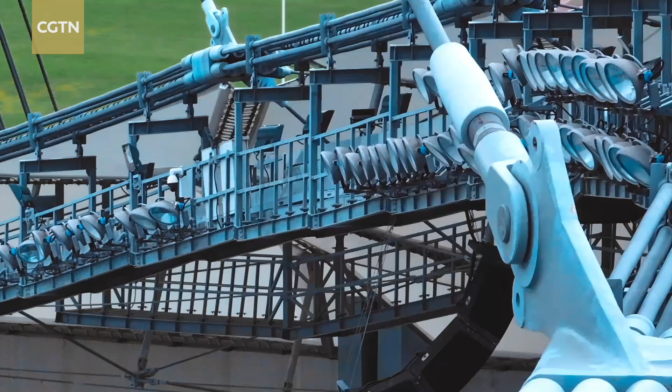What do we talk about when we talk about architecture?

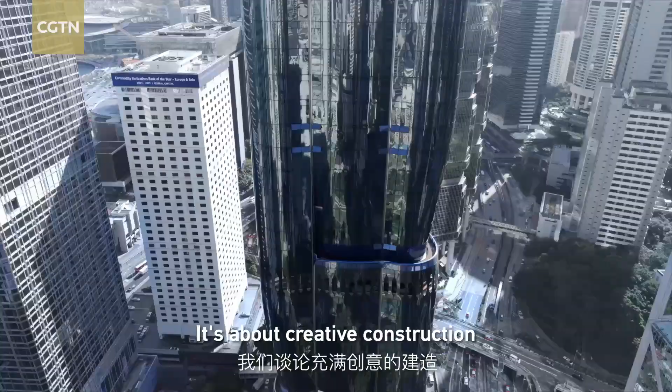It's about creative construction, the restructuring of space. The architect is the director of this space.

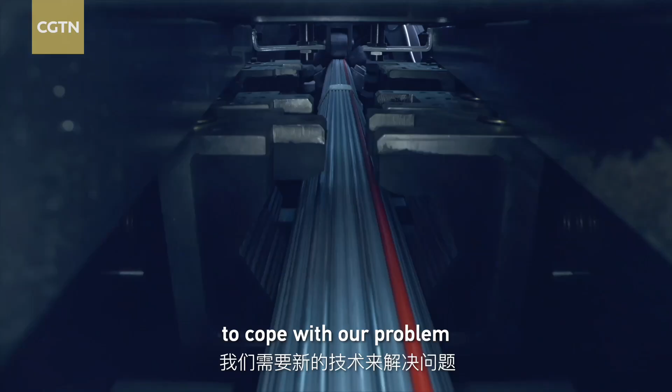The echoes of our culture, and responding to challenges. So we need to look for new technology to cope with our problems. It's all about human intelligence.

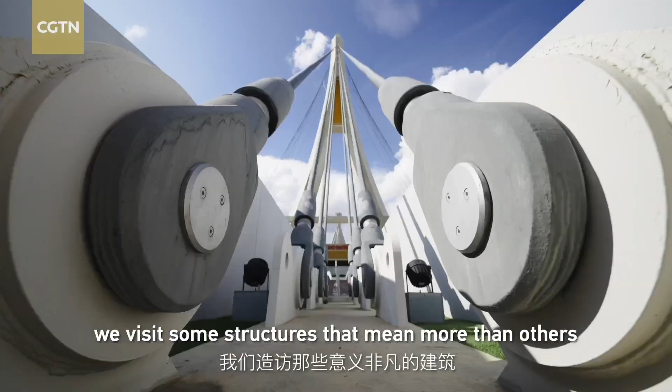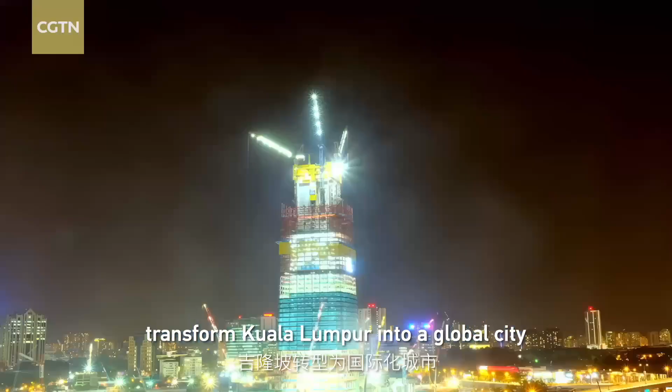In this episode, we visit some structures that mean more than others. Fireworks over the top, amazing stadium. They're not only for use, transforming Kuala Lumpur into a global city, but iconic landmarks and national pride.

We are moving in a good direction. They are imbued with greater hope and carry significant missions.

As dawn breaks over the silhouetted spires of these temples, I'm reminded of Cambodia's glory days. These stone carvings and intricate reliefs are testament to a thriving empire. It was a French explorer's surprise encounter in the mid-19th century that brought Angkor Wat to the attention of the Western world.

Emerging from conflict and wars, Cambodians today are rekindling the world's interest in this country that has been shrouded in the mist of time. Like their ancestors who immortalized the Khmer Empire in the form of Angkor Wat, Cambodians need a modern colossus to record future ambitions.

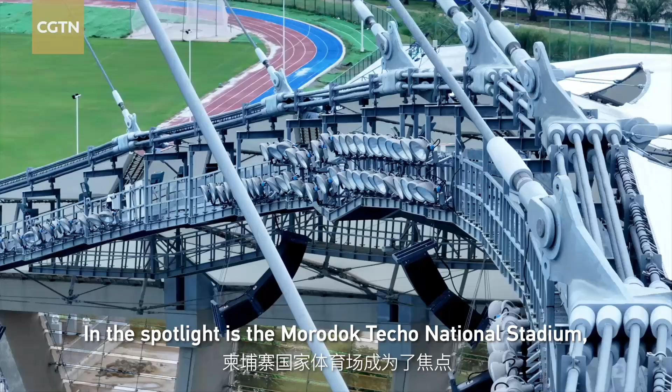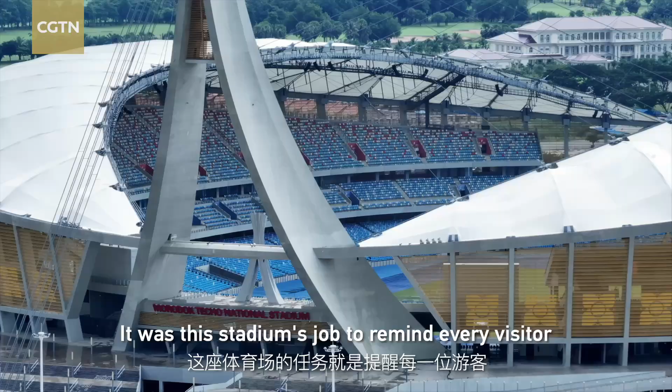In the spotlight is the Morodok Techo National Stadium, mirroring the form of a traditional dragon boat and surrounded by a moat reminiscent of an ancient Angkor structure. It was the stadium's job to remind every visitor what this nation is proud of.

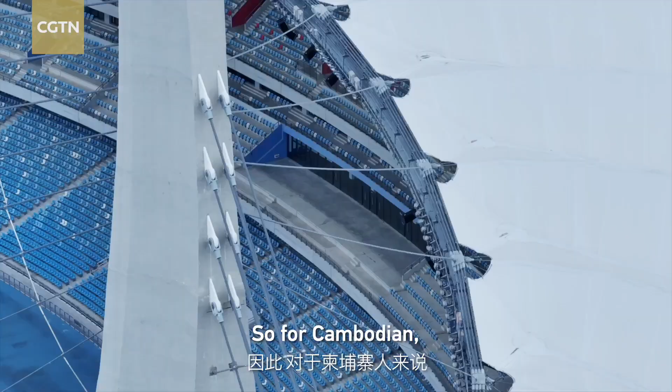So for a Cambodian, if you come to the stadium for the first time and you see the tower like that, you will realize, okay, this is the Sampeah gesture. Even though they're not told first, they can understand this.

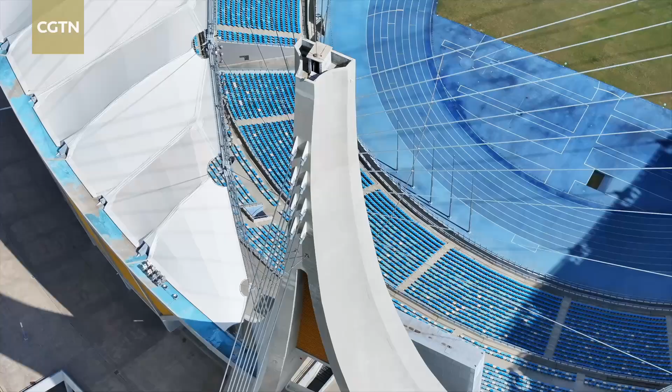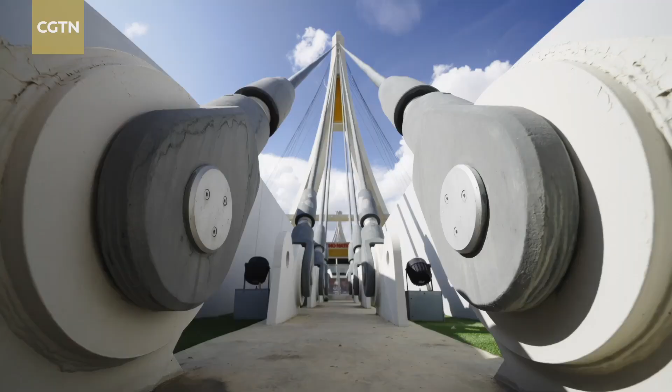At the heart of this architectural wonder are the pylons, shaped in the Cambodian gesture of greeting, Sampeah. This towering structure presented a formidable engineering challenge.

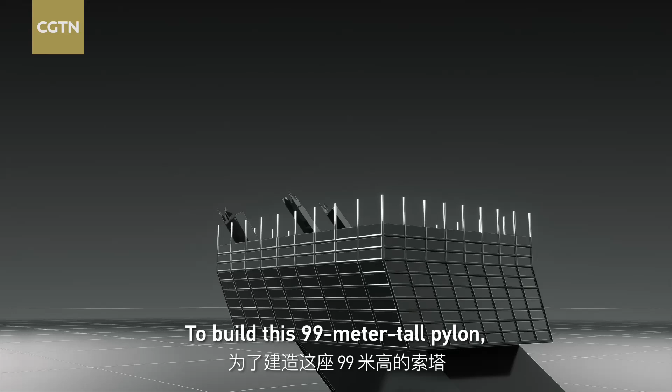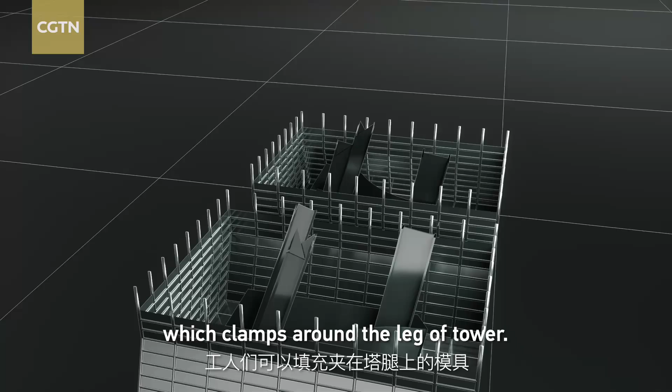To build this 99-meter-tall pylon, the team used an ingenious technique called slip forming. Workers fill the mold, which clamps around the leg of the tower. Once each layer is set, hydraulic jacks raise the mold up to the next level.

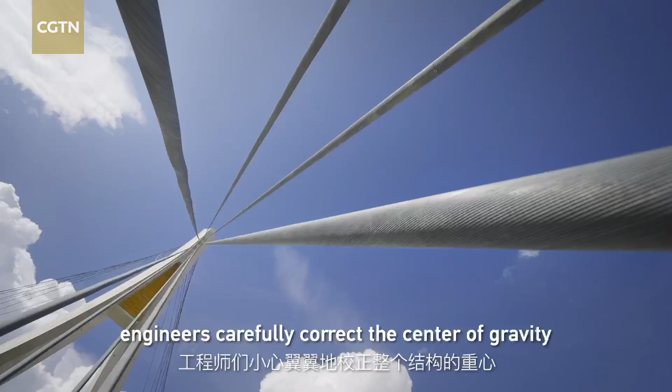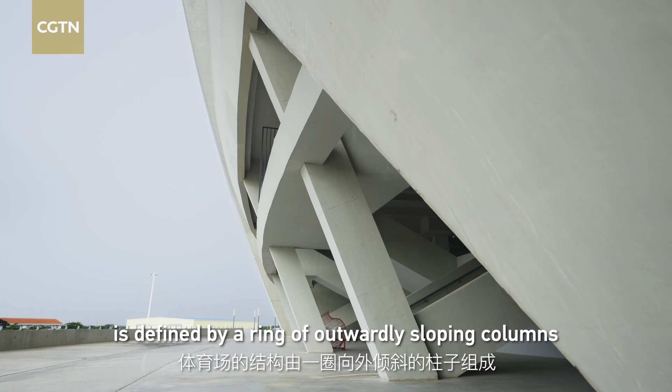However, it's not just the pylon that's leaning forward. The stadium structure is defined by a ring of outwardly sloping columns at an astonishing 66-degree angle.

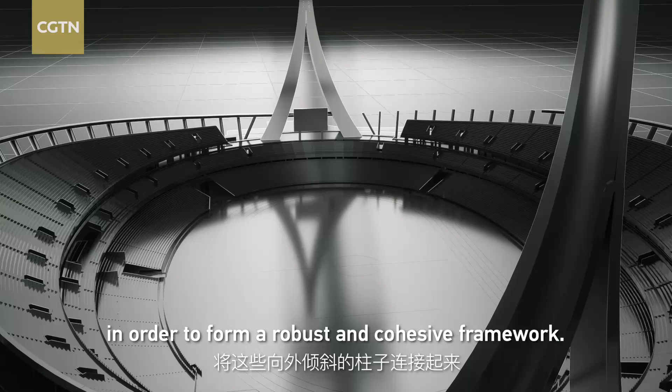This massive ring beam was built to unite these outwardly sloping columns in order to form a robust and cohesive framework. They're crowned by a huge canopy, binding the entire structure into a unified entity.

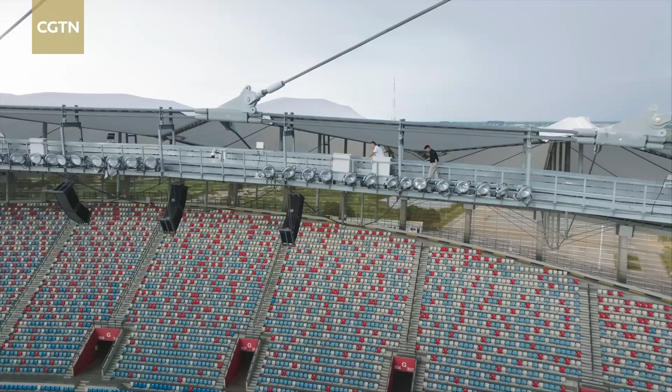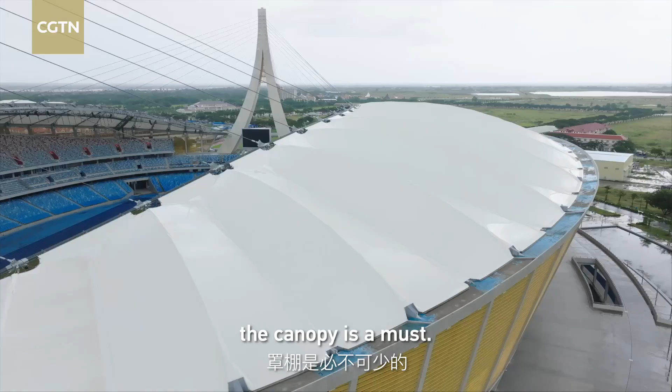In a land familiar with monsoons, the canopy is a must. But in terms of engineering, the canopy is more than just a cover—it's the final step that makes or breaks the whole project.

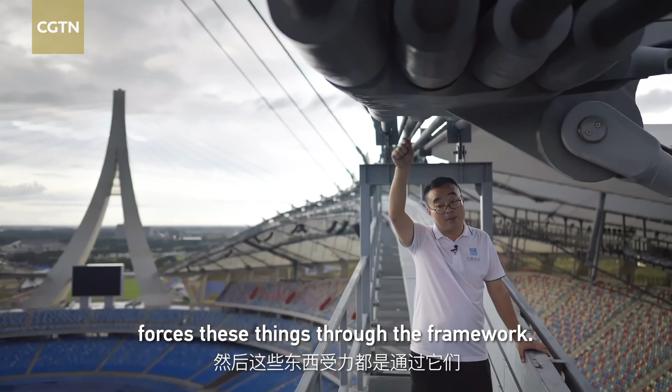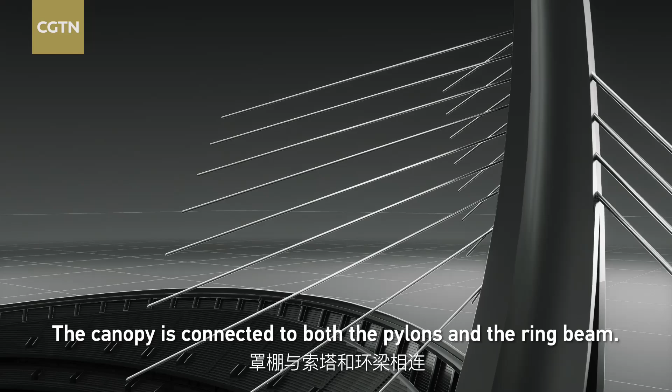The canopy is connected to both the pylons and the ring beam. As the skeleton is fully tensioned, each part of the stadium is perfectly balanced in this system, resembling a cable-stayed bridge.

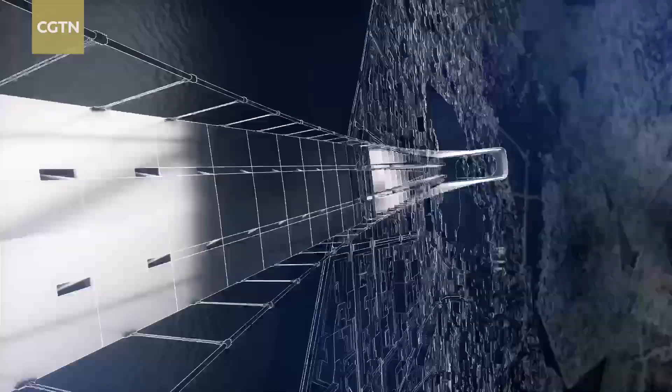Emerging from a small tin mining town 200 years ago to become the capital of one of the world's fastest growing economies in the 1980s and 90s, Kuala Lumpur is evolving again. Now Malaysia's goal is to become a high-income nation and a fully developed country by 2025, five years earlier than previously planned. This involves building the country's first international finance center.

TRX helps to transform Kuala Lumpur into a global city, helps to improve the city infrastructure, and created a new and vibrant district in the city center. Meet the Tun Razak Exchange, or TRX. Think of it as a city within a city.

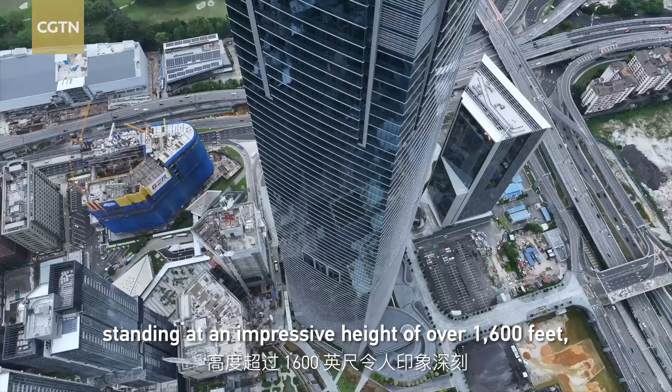They're looking for the biggest names in banking to get them to set up headquarters here. Building an iconic tower is also a part of the plan. The Exchange 106 was designed to be an iconic landmark standing at an impressive height of over 1,600 feet, around 492 meters.

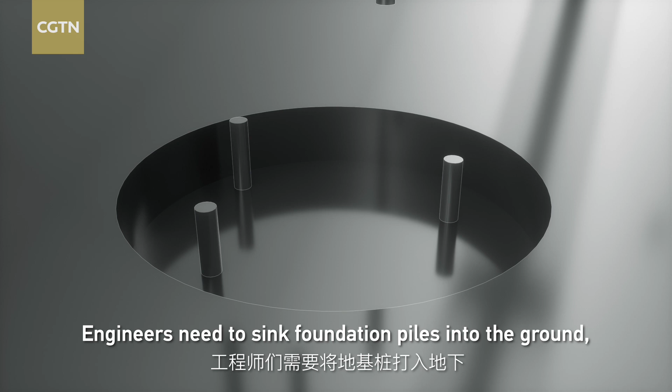Engineers need to sink foundation piles into the ground, capping them with a massive thick concrete raft to support the tower. Above ground, workers will cast a central core with an innovative mechanized mold, which allows the giant to be finished in a record-breaking 3 years.

Though without a spire like Petronas Towers, Exchange 106 is topped with a 54-meter high crown, immediately recognizable in the city skyline.

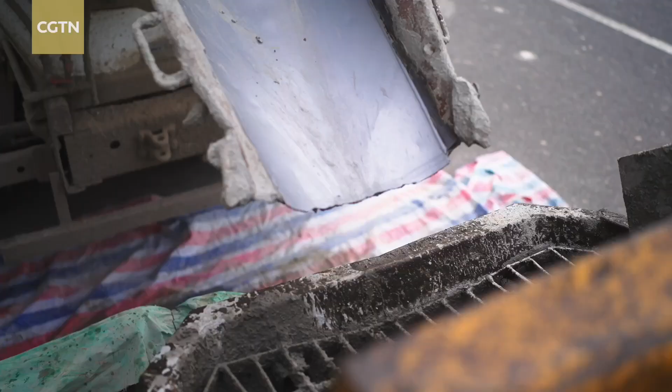Its success is based on the massive foundation.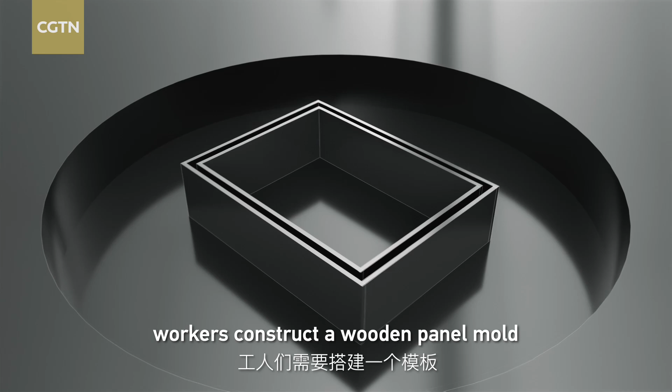Traditionally, to cast a core level, workers construct a wooden panel mold and pour concrete into it. Then they remove the panels, build new scaffolding, and lift the molds back up. For a building this tall, that would take years too long.

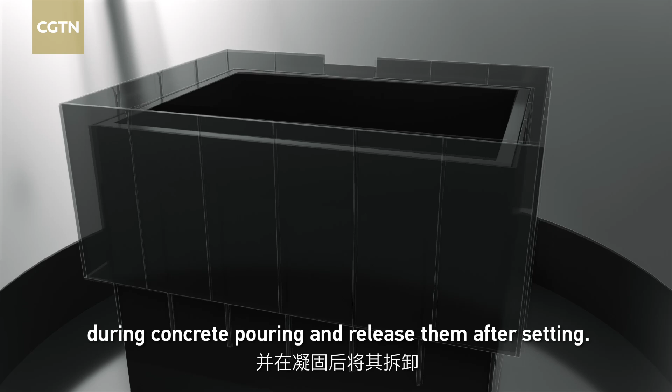Instead, steel rails attached to the core enable a large, movable platform to carry and climb with the mold sections. Workers lock the mold panels during concrete pouring and release them after setting. Hydraulic systems can elevate the platform and repeat upward transport.

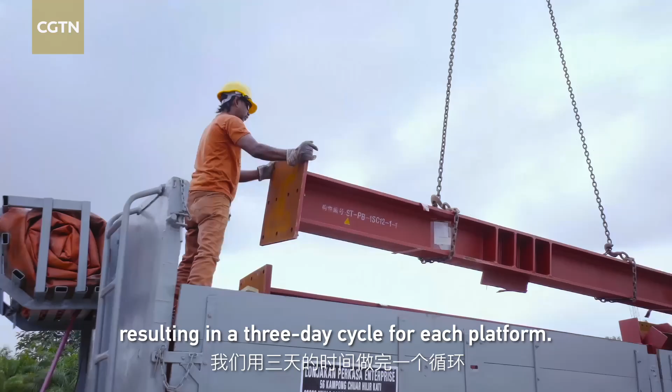I came to Shenzhen, where the same team is building another giant with the same system.

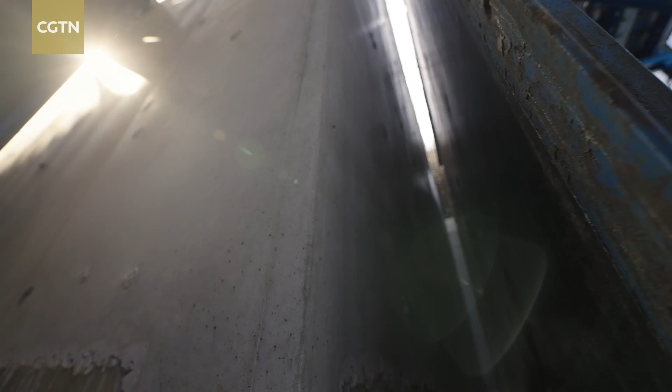They install the anchor shoes at the target position and pull up the climbing rail by the hydraulic system until it locks in position. Just like when a climber hammers spikes into the cracks of rocks, which they then clip their rope into.

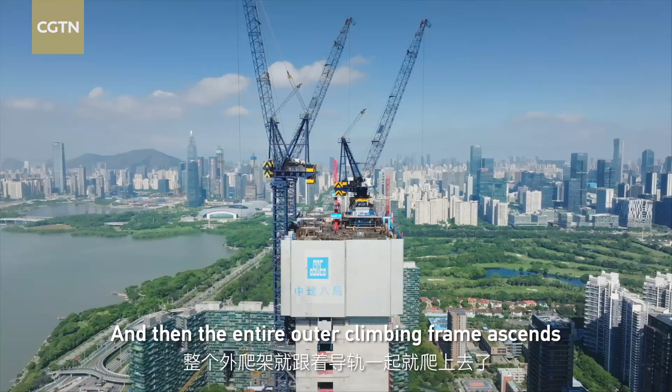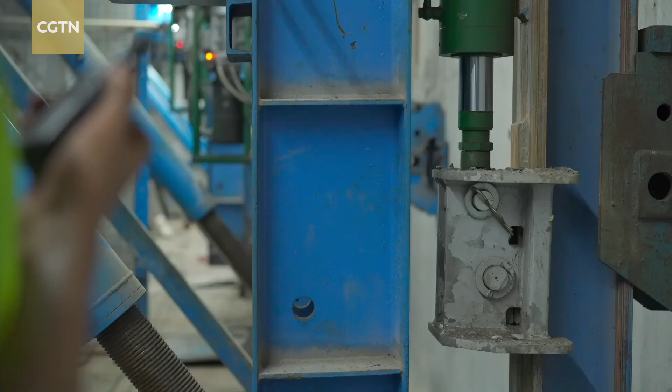The climb begins now. The entire platform creeps up with just inches to spare.

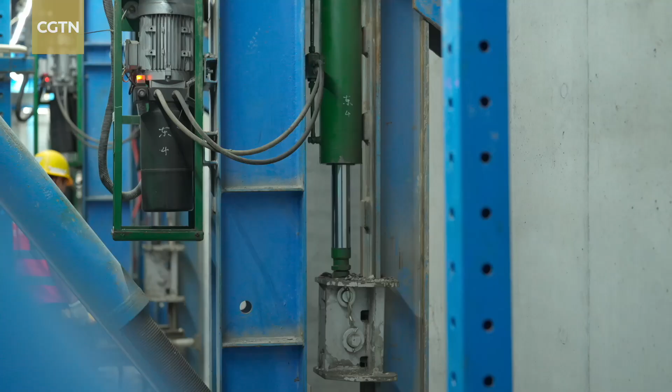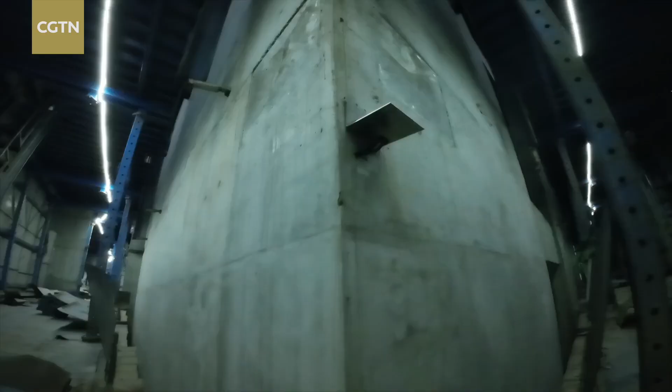Eventually, the platform stops. This innovative system pays off, and the climb is a success. But the massive formwork is not the only star of the project.

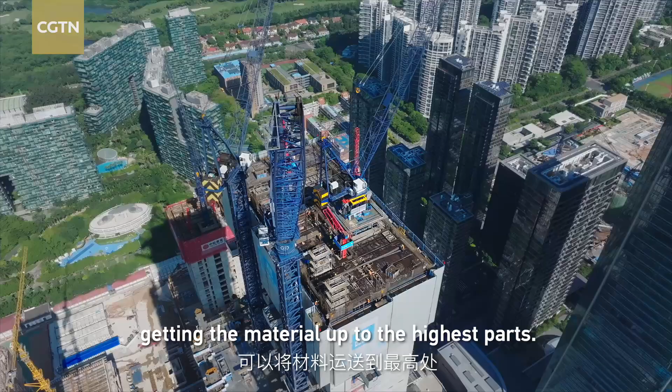The tower cranes, essential for any high-rise, are the lifeblood of the building, getting the material up to the highest parts. Fed by the busy cranes, the skyscraper soars upwards. One challenge is raising the tower cranes fast enough so the core can go up quicker.

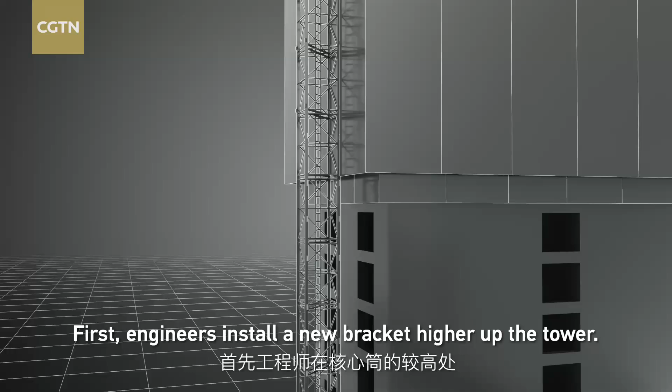With those innovative technologies, Kuala Lumpur's new landmark soars to the sky at astonishing speed. The Exchange 106 incorporates sustainable design principles and practice. The commitment to sustainability aligns with the overall vision of the Tun Razak Exchange development.

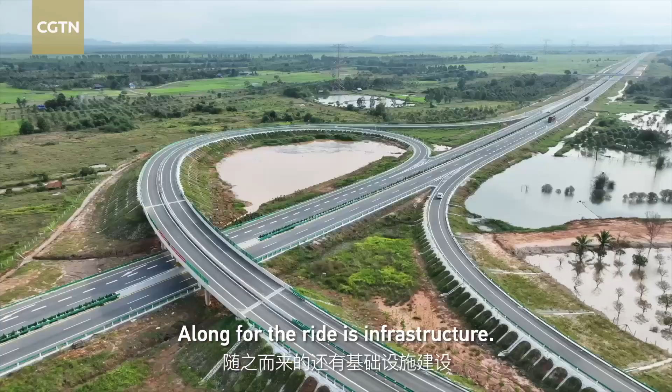Tourism contributed a staggering 32% to the GDP before the pandemic, helping this country, which emerged from war over 30 years ago, return to the world stage. Along for the ride is infrastructure: new highway, new stadium, and new national gateway.

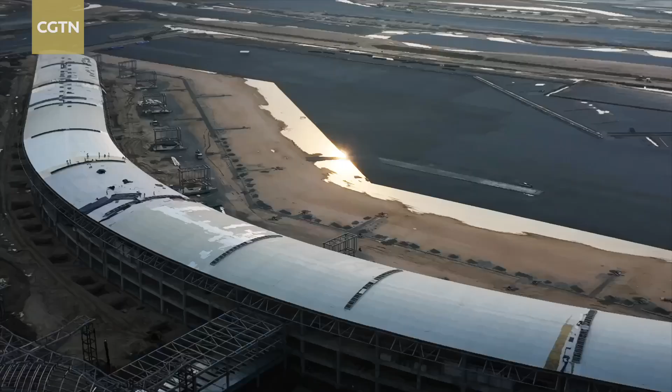Techo Takhmao International Airport in Phnom Penh, posited to be one of the largest airports in the world.

To show me around the city and her new airport, I can't think of anyone better than this man, Hong - a native Cambodian, civil engineer, and my honorary homeboy from Northeast China. I studied civil engineering in China, bachelor's degree in 2018 from Harbin Institute of Technology, in Harbin City, northeast China. Very cold place - do you like Harbin? Yeah, I like it, but during winter time I normally come back to Cambodia because it's too cold.

As the new airport's technical manager, Hong can rarely enjoy a leisurely coffee break like other Cambodians. Does this tradition start from the colonial era? Before the French colonized Cambodia, we already drink coffee.

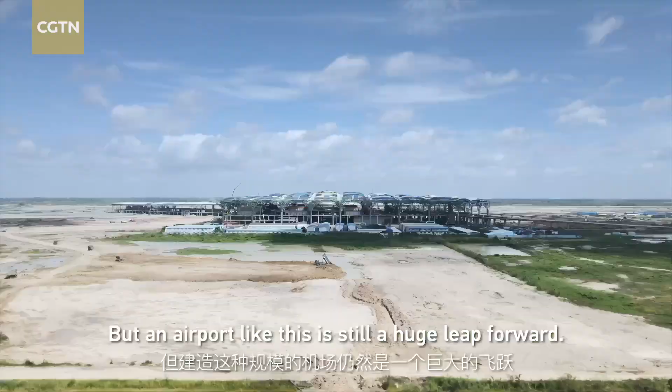The colonial days left not only coffee, but also a preference for European standards of infrastructure. After the Civil War ended, Cambodian infrastructure has been gaining momentum in recent years with foreign aid from countries like Japan, South Korea, the US, and China. But an airport like this is still a huge leap forward - if finished, it will be the 9th largest airport in the world.

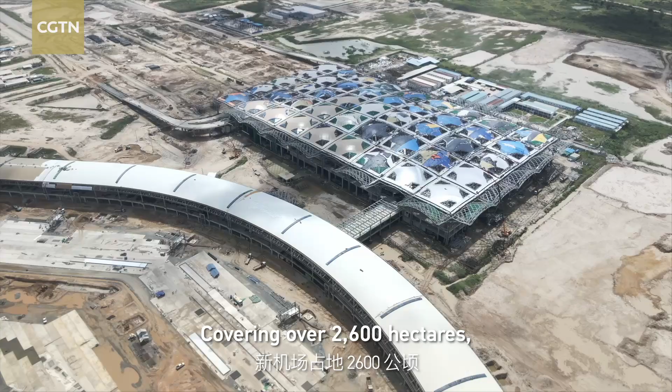Covering over 2,600 hectares, the airport is designed to feature 3 four-kilometer runways for landing the largest long-haul aircraft, and to handle 50 million passengers annually. It has been designated a 4F level airport.

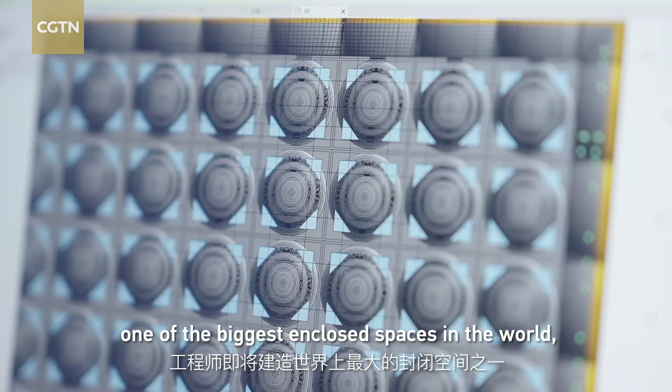Engineers are about to create one of the biggest enclosed spaces in the world, keeping it light and airy. A big space requires a big roof, and at 216 meters wide and 324 meters long, this is no ordinary roof.

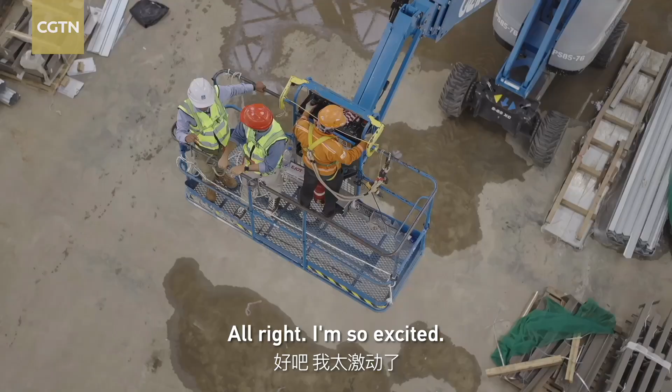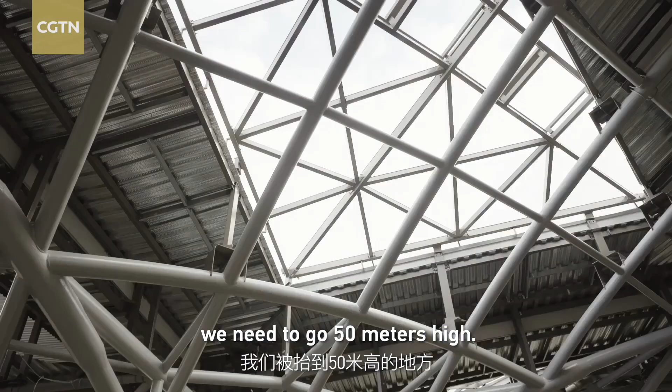All right. I'm so excited. You can see now the steel structure - we do the skim coat. That's the largest rooftop in Cambodia. To touch the roof, we need to go 50 meters high. Because you need the span to be big, you need to use this kind of structure. And the difficult thing about this kind of structure is there are a lot of connections - you can see the welding.

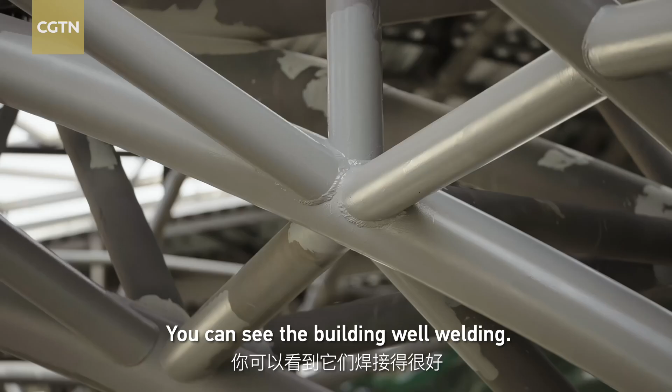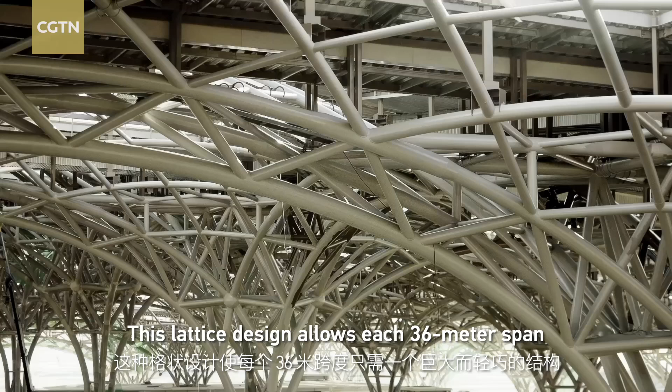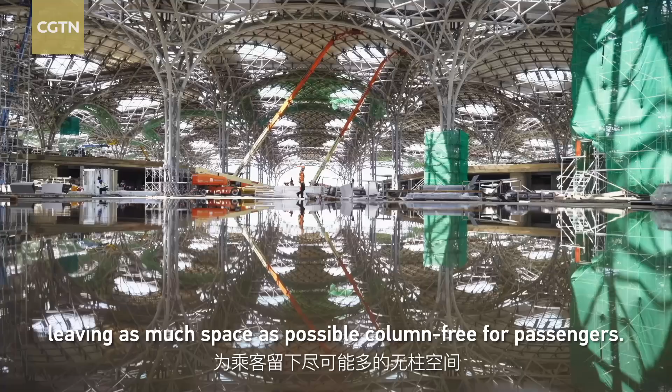By reorganizing the steel beams using simple geometry, they become stronger despite weighing less. This lattice design allows each 36-meter span bridge, with just one huge but light structure, to support itself without half the pillars - leaving as much space as possible column-free for passengers, for the passenger flow to get a good view, and also for the passenger flow to go inside the terminal for checking, they can go fast.

Cranes are deployed along the perimeters of the terminal to lift the roof components. It's getting harder as the lifting work goes to the center.

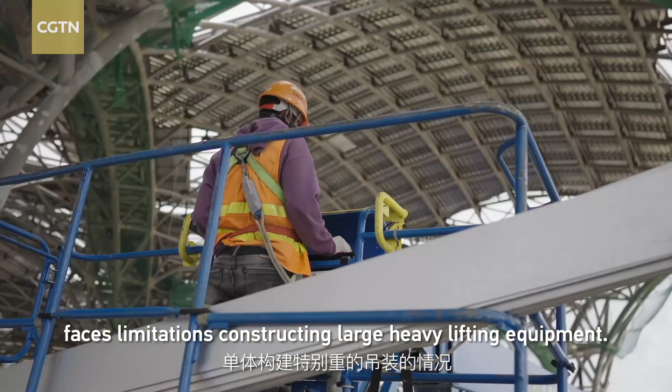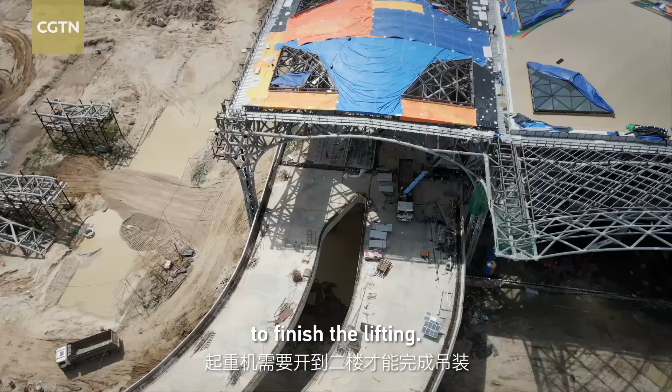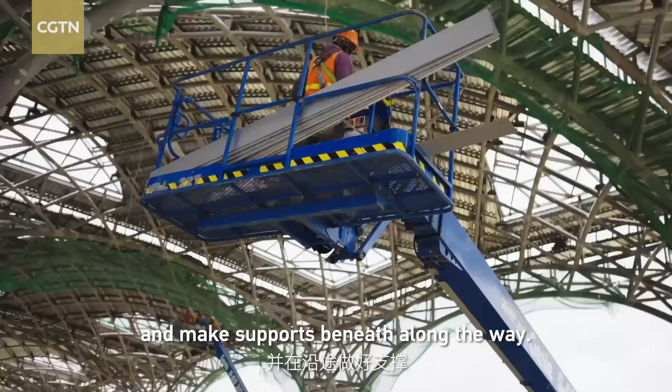The crane needs to be driven up to the second floor to finish the lifting. To prevent the slab from being crushed, the engineer needs to precisely plan the crane's working route and make supports beneath along the way. It's kind of a math game to get the maximum lifting area with the minimum travel area.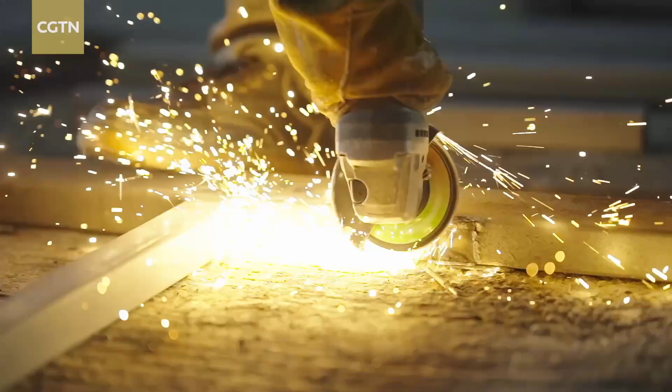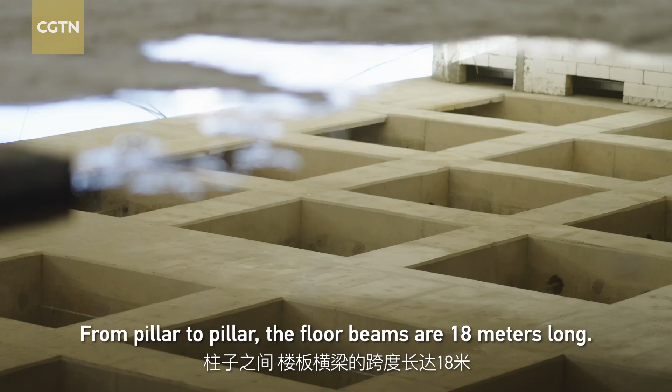At airports, it's not just the roof that has huge spans - there are also the floors. From pillar to pillar, the floor beams are 18 meters long. The span is big - if we use the normal concrete reinforcement, the deflection might not be good enough.

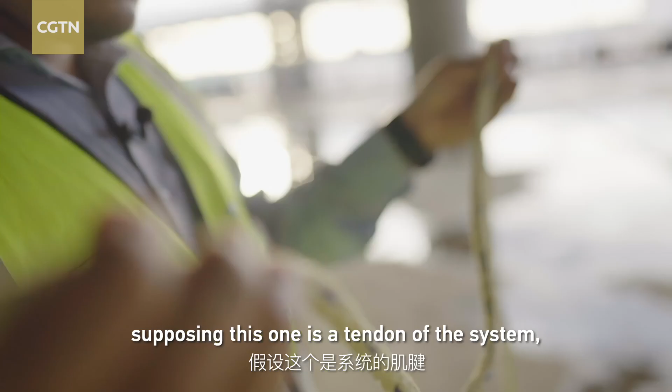The team is using post-tension technology to solve it, by threading the rebar into the slabs. Supposing this one is a tendon of the system - when you stress it, it will go up, and when it goes up, it gives the beam additional stress, making the beam stronger than a normal reinforcement concrete.

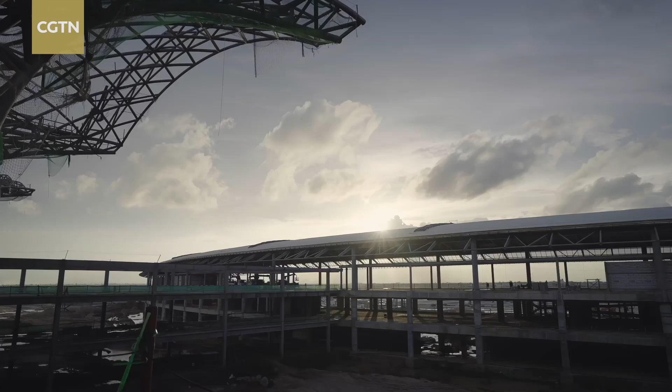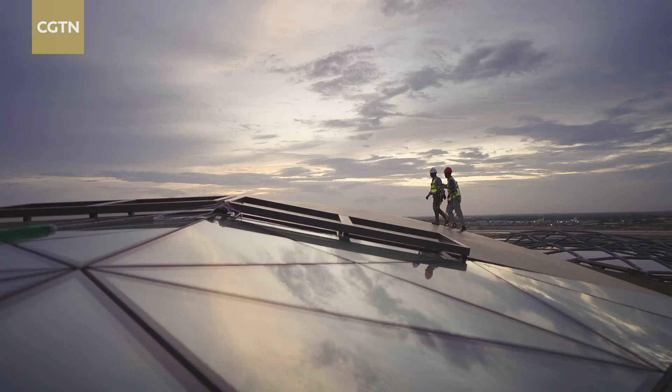Can we get to the top of that? Yeah, we can go, it's safe here. Wow, more beautiful. You can see Cambodia's future from here. That's the future - that's Cambodia's Manhattan.

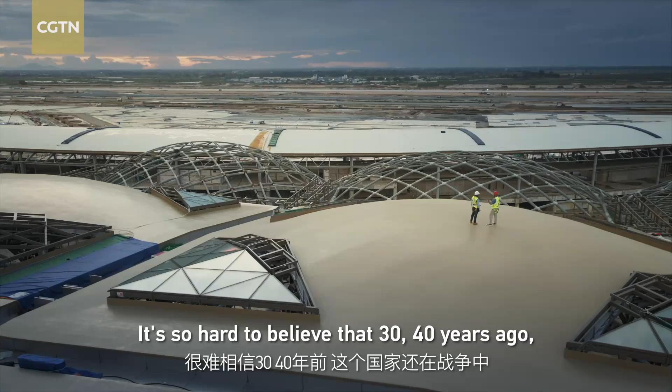After this airport is finished, there will be one highway to go to Phnom Penh City, so we might spend only 20 minutes from here to Phnom Penh. It's so hard to believe that 30, 40 years ago this country was still in war. Yeah, we are moving in a good direction.

Architecture is more than just concrete and steel. It is the bearer of our dreams and hopes. It redefines the city's identity, attracts global attention, and can even drive the revival of a nation.